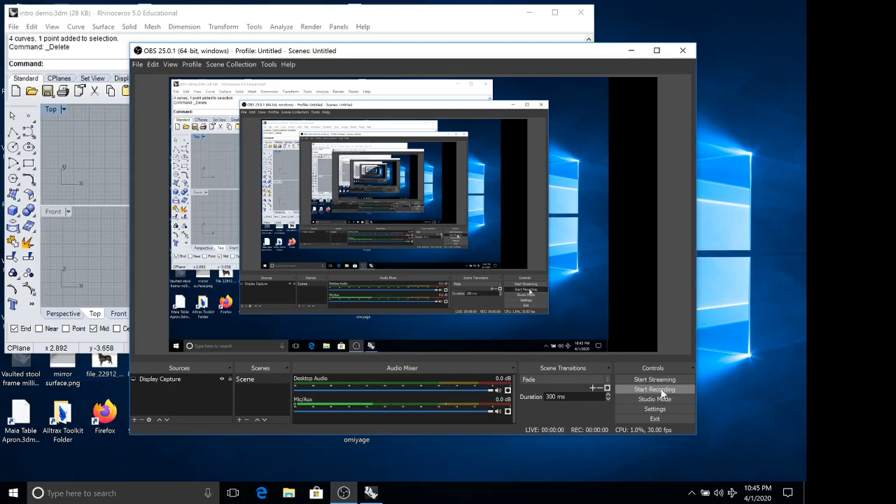Okay guys, so I'm going to walk you through how to do the tool tote. This won't be a completely exhaustive explanation of Rhino, but hopefully by actually making a drawing of something that you're going to build, it will land a little bit easier.

The first thing I'm going to start off with is making sure I'm in the default layer, and I'm going to make a rectangle to encompass, just like we did with the orthographic drawings, the furthest extents of the geometry. So I'm going to start at the origin, so I'll say 0, 0 for the first corner of the rectangle.

For the next corner, it will first ask for the x-axis number and then the y-axis measurement. So if I type 20, it will go to 20 inches out on the x-axis, and then if I type 10, it will go to 10 inches up on the y-axis.

And these dimensions are somewhat arbitrary. We left them open so that you guys would have a chance to really customize your tool totes for your own uses, so I'm kind of making them up as I go along. Now I have a rectangle symbolizing the full extent of my tool tote here from the front.

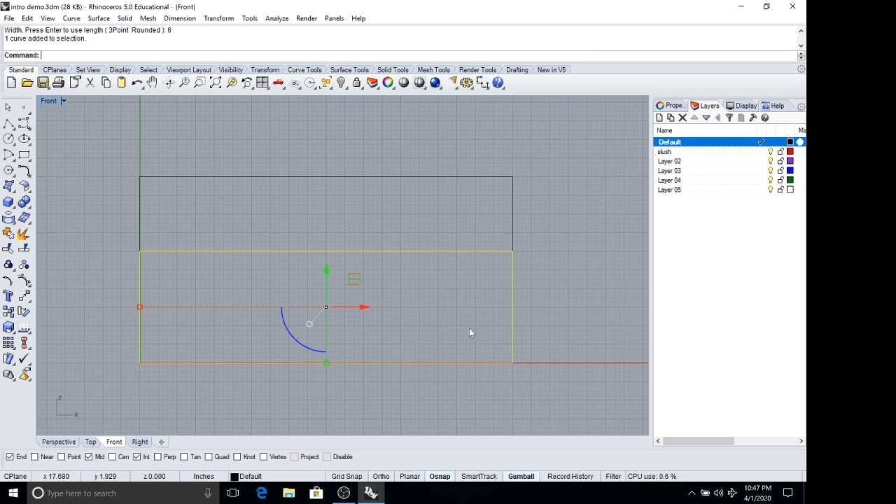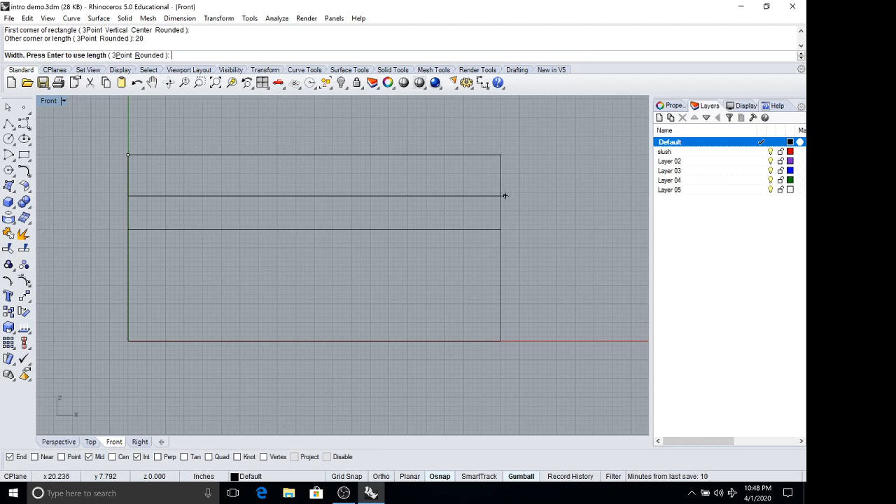Okay, so the next thing I'm going to do is draw the handle. I know that's going to start from the top, so I'll go into my polyline and click rectangle. Again, I want it 20 inches long, and because I'm coming from the top, the y-axis measurement is actually going to be a negative number rather than a positive one. So I'm going to say negative 2.5.

Okay, so I have these two rectangles placed now. And because this handle looks quite heavy, I will probably make an arc that I'll shape into it so it looks a little bit less heavy.

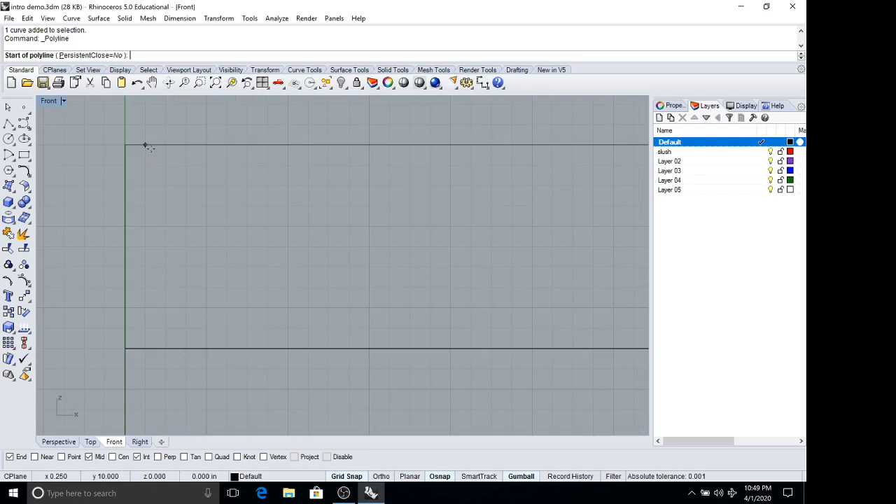So first thing I'm going to do is sketch out where my side panels are going to be, so I know I have a little bit of a straight to accommodate for joinery. I'm imagining my side panels are only going to be about half an inch wide. I could even turn my grid snap on here, and since each part of the grid is a quarter inch, half an inch is going to be 2 sections of the grid.

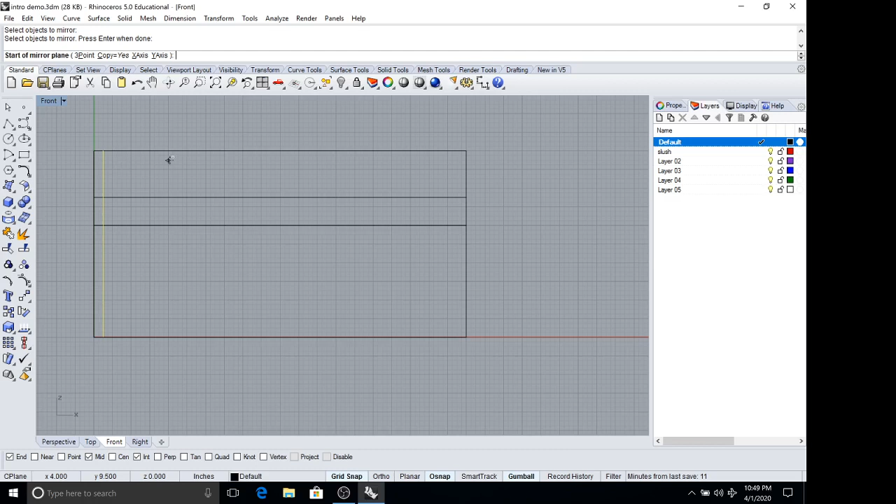Then I could do the same thing to create the side line on the other half, or I can save myself a little bit of work and use the mirror command. My command bar will always prompt me on what to do next—it says select objects to mirror, so I'll select this line and hit enter. Then it says start of mirror plane, which is basically what the line will be flipped over. I'm going to use my midpoint so my mirror plane is centered, then hit shift to go into ortho and click.

So now I have my two side pieces kind of indicated. I definitely want a good portion of my reference face kept for when I make this curve, so I know for sure I'm not risking carving into my joinery.

And then to make a curve, there's any number of ways to approach it. If I go into my curves here, you can see I can do an arc, which basically means it's a section of a circle, so it has a consistent radius. I can do an ellipse, a parabola where the radius is exponentially increasing or decreasing, spiral, or helix.

If I go into my different polyline options—actually I can't remember their names that well, so I'm just going to go into line.

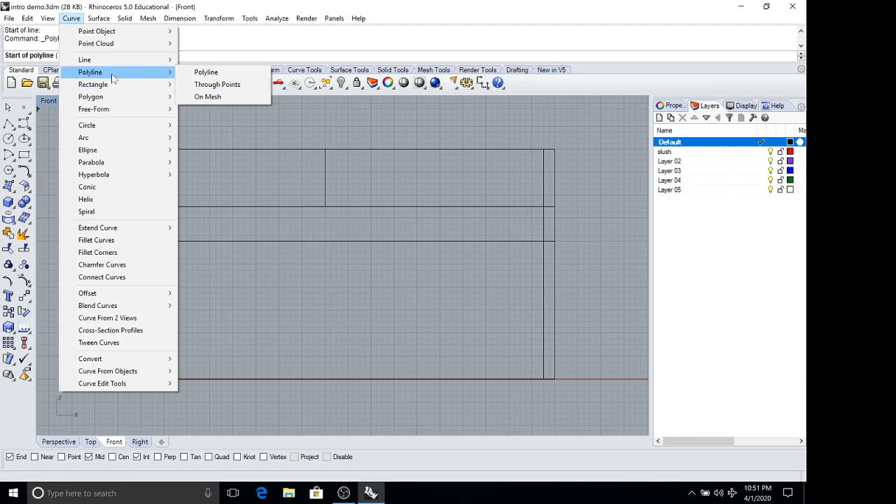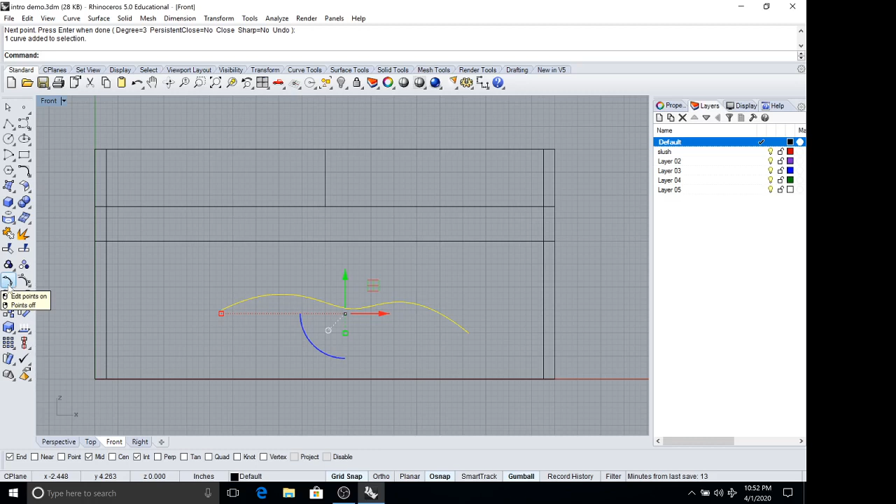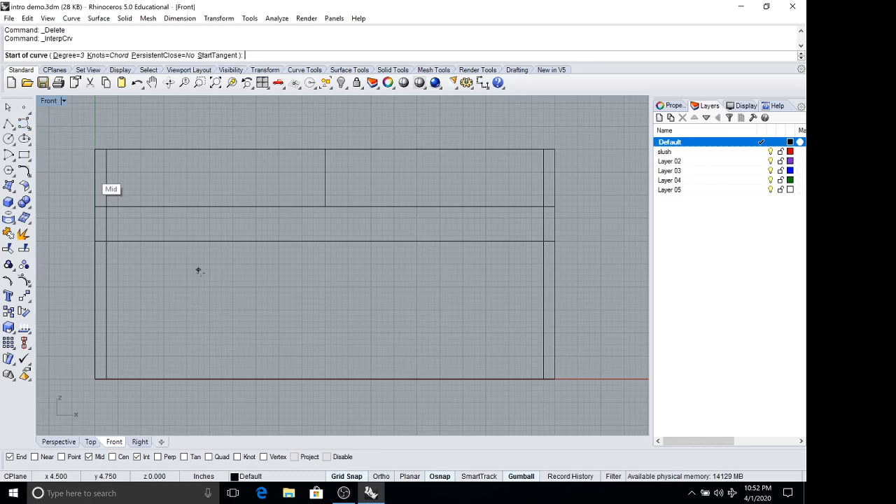And so a regular polyline, or regular curve, the control points are basically - if I go into this curve, you can see my control points are not connected to my curve, so I have a little bit less control over what the curve looks like. So if I turn my control points on, meaning making them visible, it's just a little bit less direct. So typically if I'm doing a free form curve, I'm going to go to the second option, which is curve interpolate points. That allows me to have a lot more control over what the curve looks like because the points are passing through the curve.

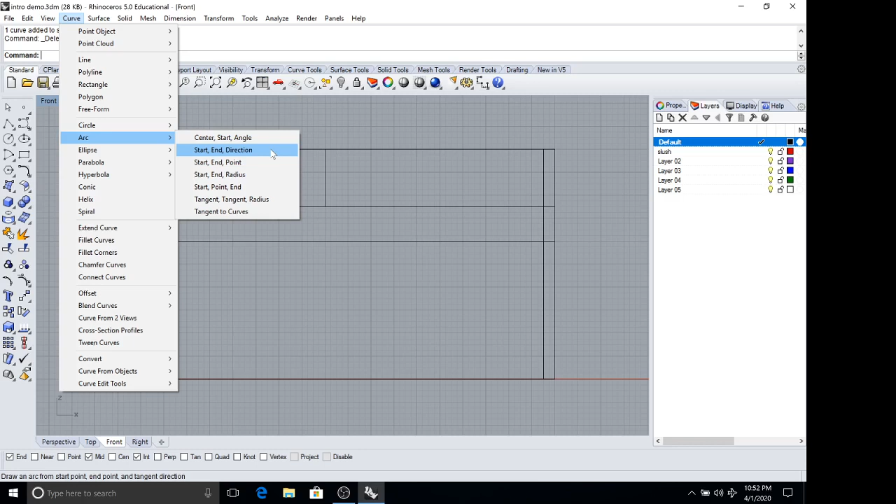For this particular curve in the handle, a constant radius will do just fine. So I'll go into arc and look at the different options that I have - start, end, direction, and point, and radius. I really have a whole bunch of different choices, you kind of have to just experiment with them and see what it looks like. So this one, I kind of control the radius with the angle of that final line there. That might be a good option. So I'll hit return and that will put me back into that original command.

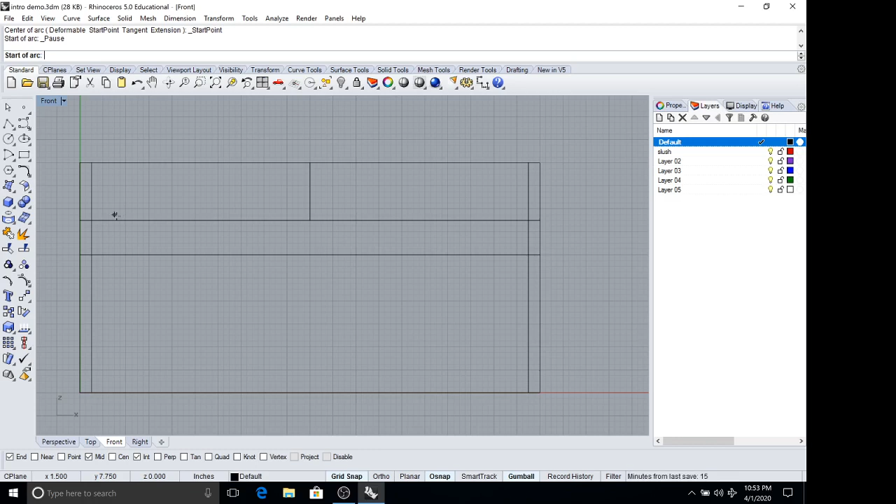And I'll go a half inch in on either side. Maybe I'll go an inch just to be safe. So I can kind of eyeball this and see what feels right, or I can type in a specific angle that I want. In this case, I'm just going to kind of eyeball it. And that looks good to me.

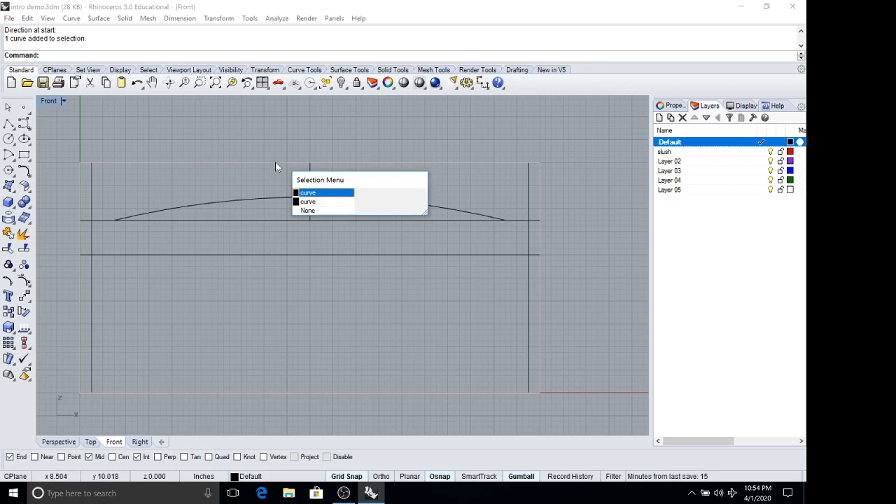So now what I have for this particular handle here is that closed curve, plus my arc, plus where it intersects the sides. So right now there's not much I can do in terms of making this 3D because none of these curves are connected to each other.

So what I can do is I can start creating different layers. So if I say this is going to be my handle layer, this is going to be - I'll just make it all the sides. This will be the bottom, that should probably be enough for now. This will be the slush. And I'll also make sure to save. It's a huge bummer when you've gone pretty far and then suddenly you realize that you haven't saved in ages and the entire program crashes.

So what I'm going to do now is create a new geometry that just includes the handle with the arc, but not including the through mortises that go through. Actually, no, I'll just include the full length of the handle. So that will be this guy here, and this curve here. So what I'm going to do is use the trim command.

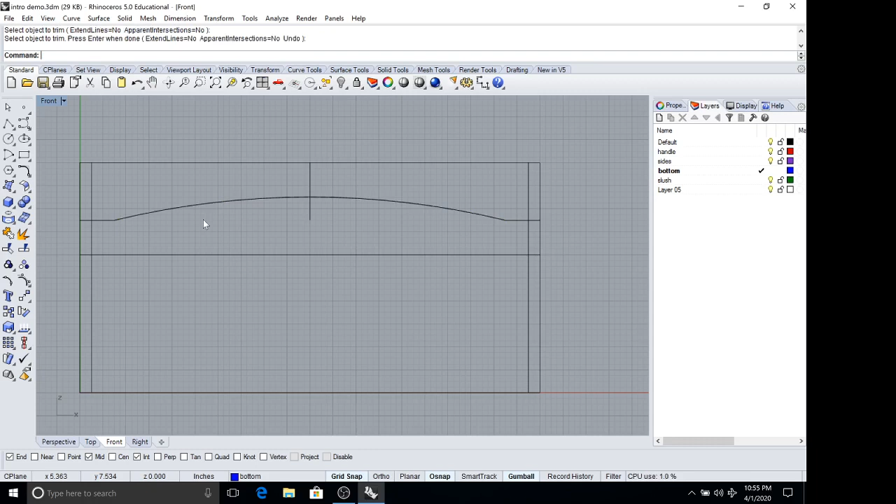It will say select cutting objects, so I want my arc to be a cutting object. Hit return. Select object to trim, I'll hit that rectangle, and then enter when done. So now if you look at my properties, I have two open curves. Open curves, you cannot really create a solid from - you can only create a surface. So I want to create a solid, so I'm going to select these two curves and join them together. And so you can see now on my properties, this is now a closed curve here.

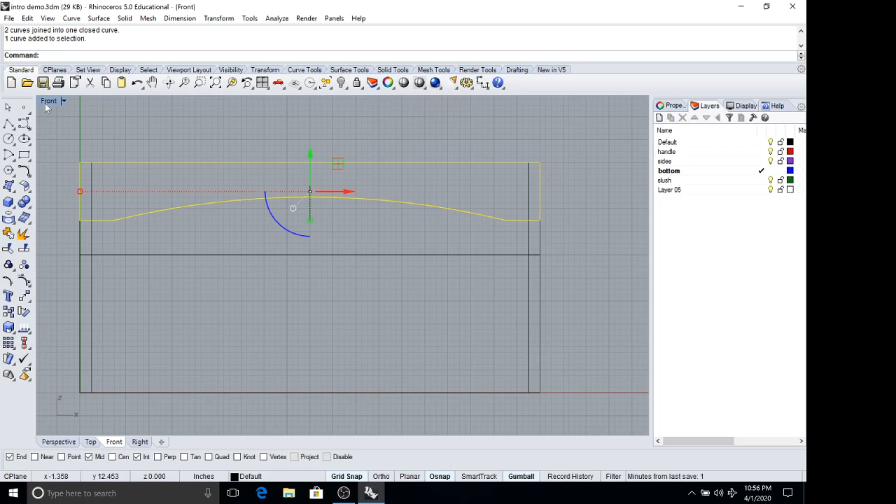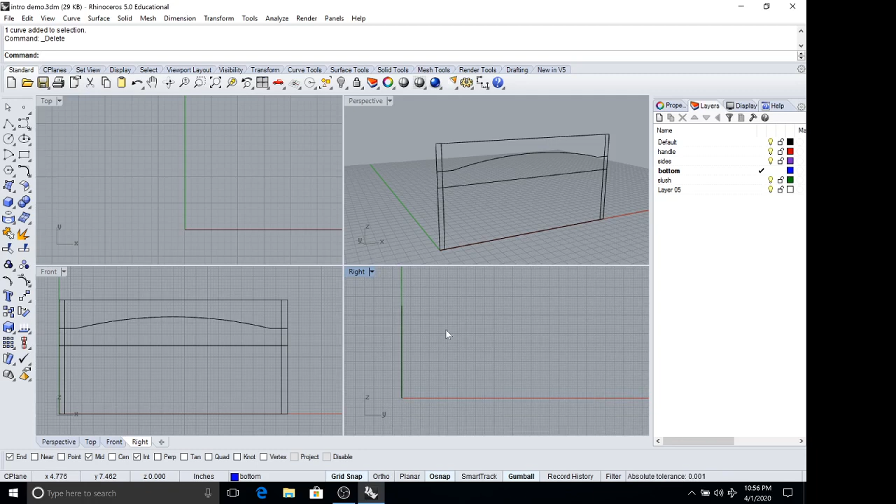Okay, so I think we've fleshed everything out from the front view. I'm going to double click and go to another view now. And you can see from my perspective that everything is planar, meaning that it's all along a single plane. Now that I am jumping into another viewpoint, there's always the risk that I could accidentally draw in multiple planes, but hopefully I'll continue to go into perspective and double check myself, and if I do draw in multiple planes, there is a command to reverse that.

So now I'm going to draw in my right view, and I'm going to draw the profile of the side pieces. I already have here all of my geometry lined up. And I'll first start - I'm going to hit 0, 0 because I don't want to be clicking way out. I'm going to be in the sides layer. And I know it's probably going to be, let's say, 6 inches wide and 10 inches tall. So to me that looks a little bit awkward, so maybe I'll make it 8 inches wide.

And that looks a little bit nicer. I'm going to draw a center line because it's always going to be easier to draw one half of my geometry and then just mirror the other half over.

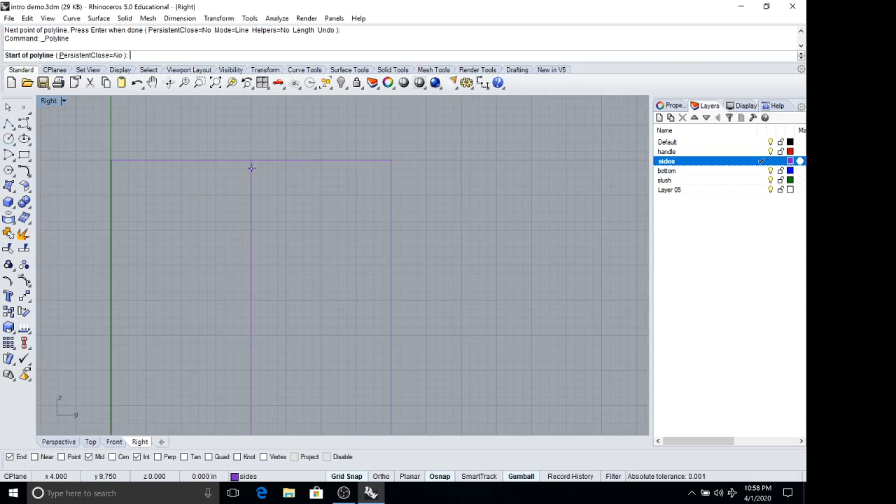I'm going to decide on the placement of my mortise. If I just draw a line to symbolize my handle, I know that my handle is 2.5 inches. So I need to have a through mortise that's smaller than that 2.5 inches.

So what I can do is split the center line here. If I say split, objects to split, cutting objects, you can see now this has become its own center line. So now I should be able to draw a line to indicate where my handle is, and draw a line to indicate the smaller mortise.

Let's say that my handle is a half inch wide. Maybe I can make it a little bit beefier and make it 3/4 inch wide. I'm going to delete that. I'm going to actually just draw my handle in space and then place it afterwards.

I'm going to turn off grid snap. Actually, I don't need to turn it off just yet. I'll make it 3/4 inch wide, 2.5. And by touching off on my beginning point, I created a closed curve.

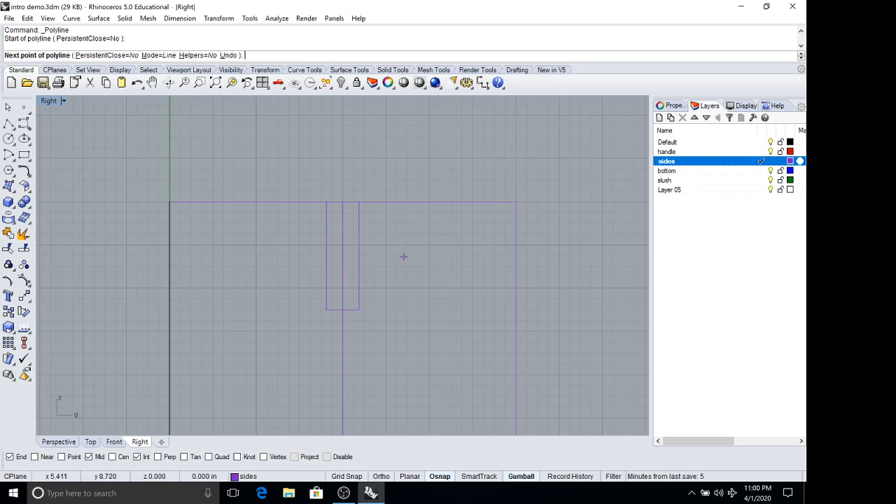I'm going to click kind of in the middle of nowhere and say 3 divided by 8 for 3/8, because this command line can do math, which is really useful. I'll use shift as ortho, say 2, 3/8.

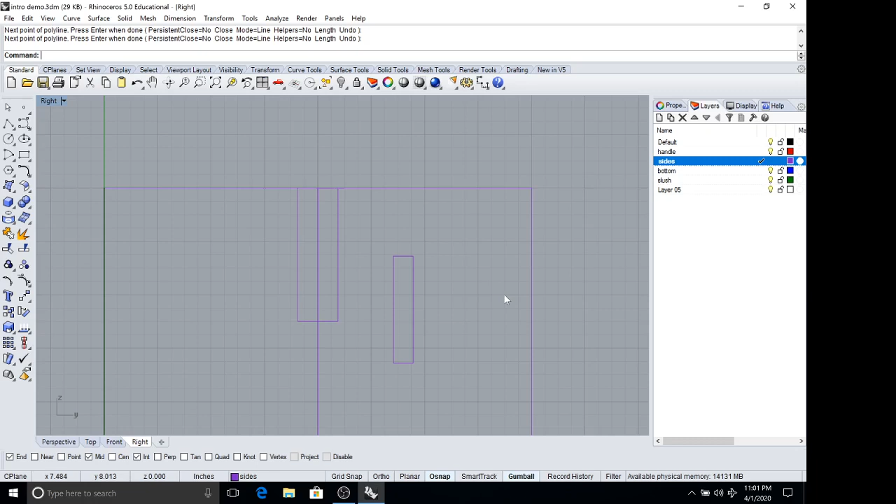Now I should actually be able to use my center snap to place this guy. So I'm going to say move, select objects to move, snap on my center, and then snap on the midpoint of my line here. Now this guy should be able to just go into my slush, because this just indicates the side of my handle.

And so I will hide that there. And this is actually looking too close to the end grain right there. It's going to be creating a lot of short grain. So I'm actually going to move my entire handle downwards.

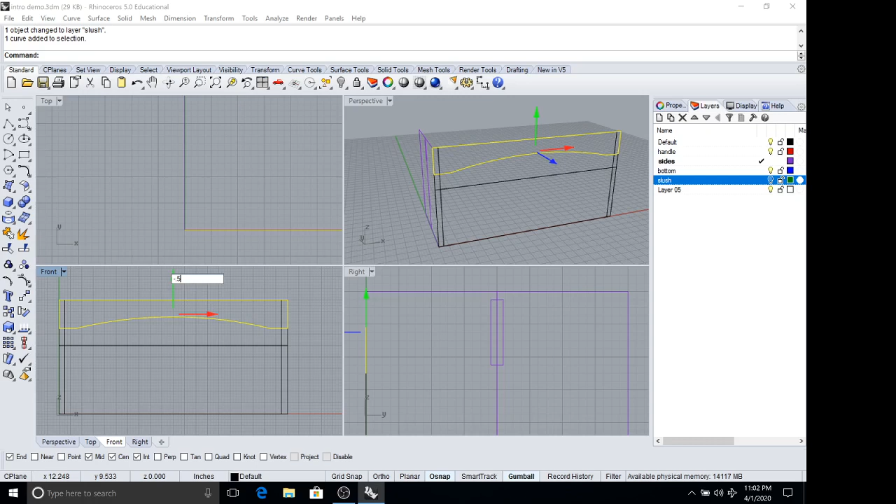So I'll move it downwards by 1/2 inch, minus 0.5 or minus 1 divided by 2. And I'll do the same with this guy here, minus 0.5. That looks a lot better, because now I have almost exactly 3/4 of an inch of short grain there, which is a lot stronger than the 1/4 inch that was there before.

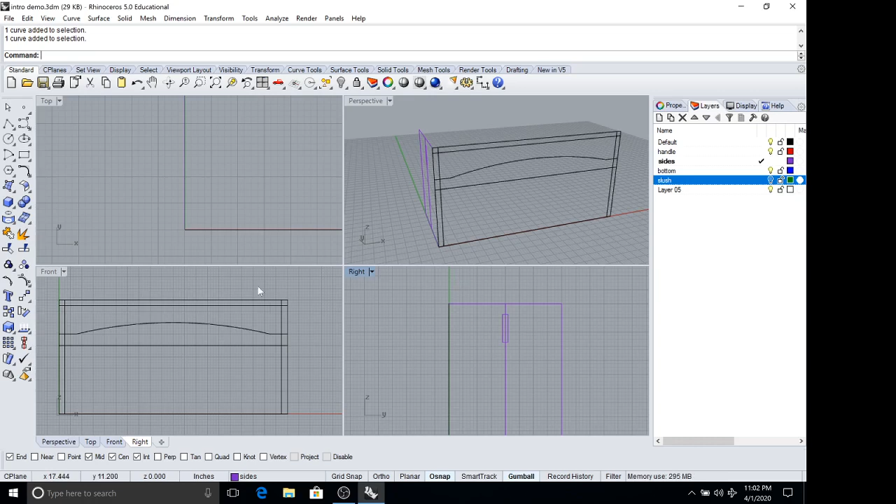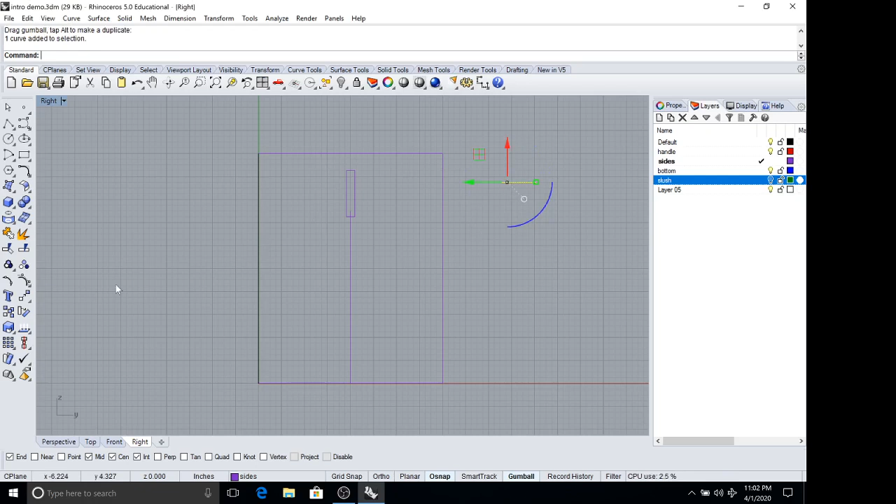Okay, so now going back into my right view, I can start to reuse this line here. I'll move it out of the way. I'll angle it to 90 degrees, and that can be the width of the top of my tool tote. And I'll select the midpoint and the center line.

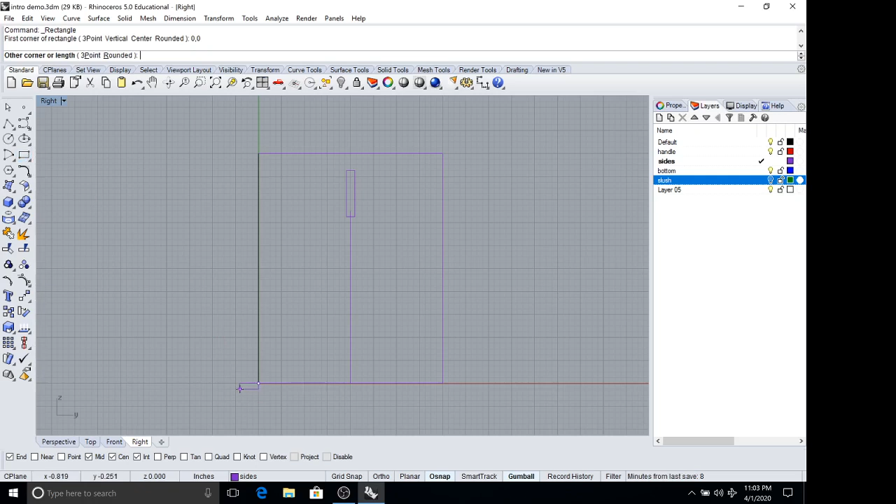And then I know from my side pieces that those are going to be 6 inches tall. So 0, 0, 8, 6.

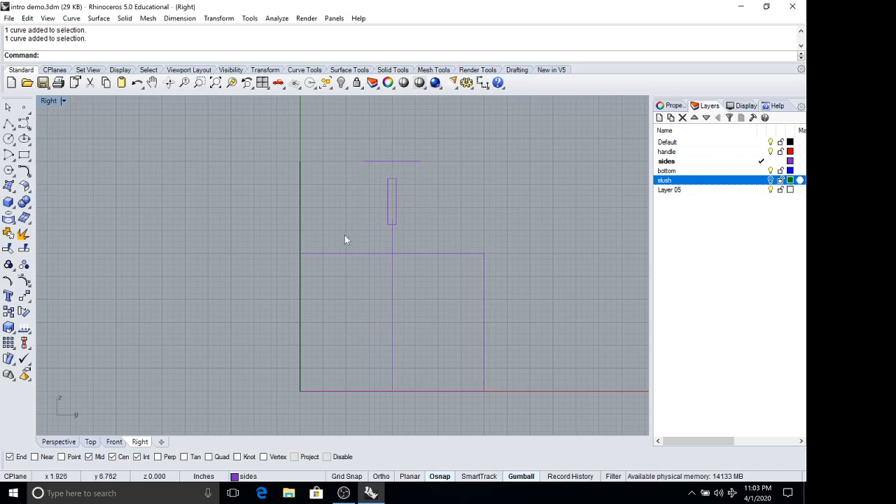So if I delete this all-encompassing rectangle, I have the top of my tool tote here, the dimensions of my side piece, my through mortise here. So now I just need to create some nice lines in between.

So one arc that I particularly favor is start, end, direction, because what I like to do is hit the start, the end, and then just snap into ortho. And that usually just creates a really nice looking curve for me. Feel free for you guys to experiment around and put your own personal twist on it.

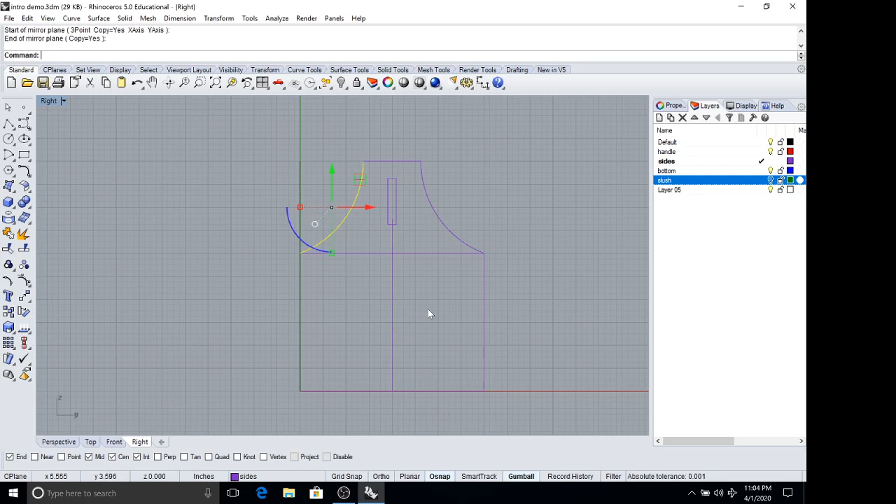And then I can mirror that over. Now I have the side profile of my piece, and these are all open curves right now, so I want to make it one closed curve.

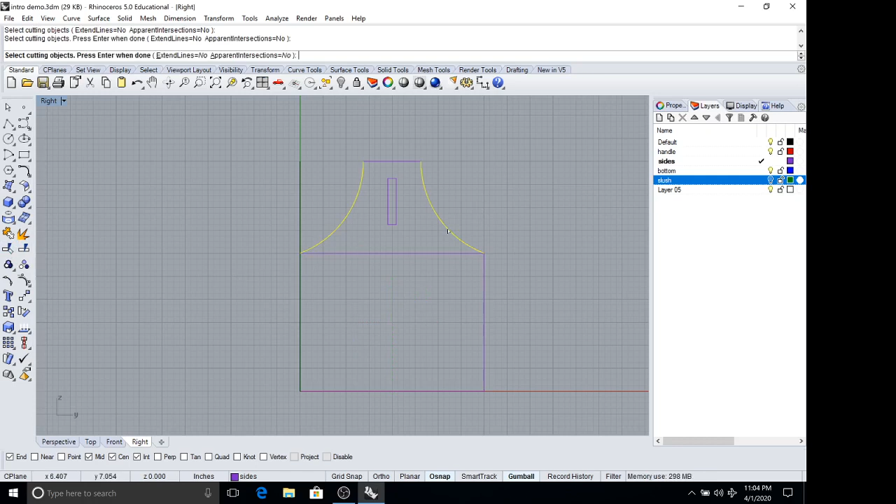So again, I'm going to use that trim command, select my cutting objects, return, object to trim, return, and then you can see when I select on this line, it shows me all that other geometry that I drew on my front viewport, but I want this geometry here in the purple.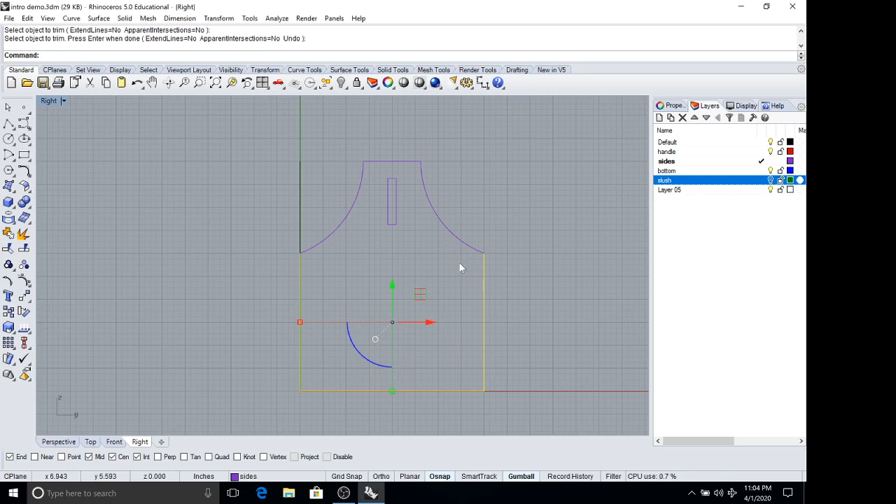So select that, and then I can actually hold down my shift key. Shift key is basically additive in Rhino, and drag from right to left. So when you drag right to left, everything that you even touch just a little bit gets fully selected. If you drag left to right, only the bits that you specifically select all the way will become selected. And then I'll join those together.

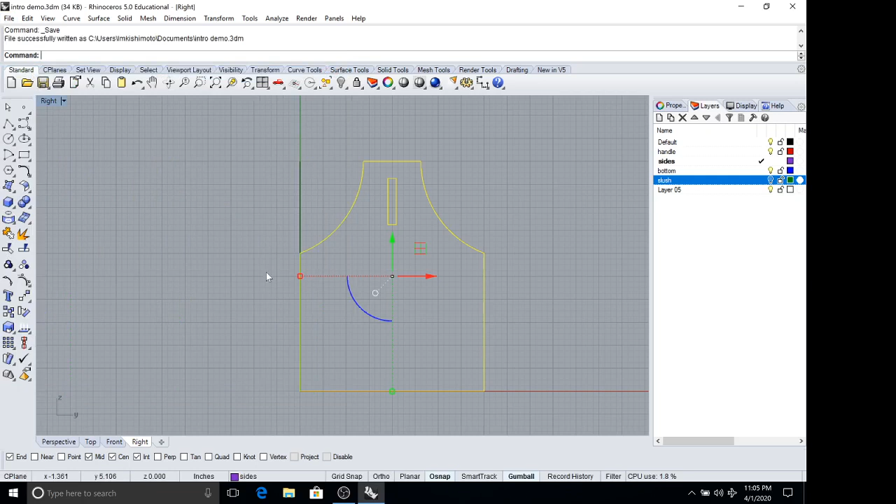And hit save one more time. Okay, so now I'm just going to go double check to make sure my geometry is all in a good place. Looks pretty good. And now I can start getting ready to make this 3D.

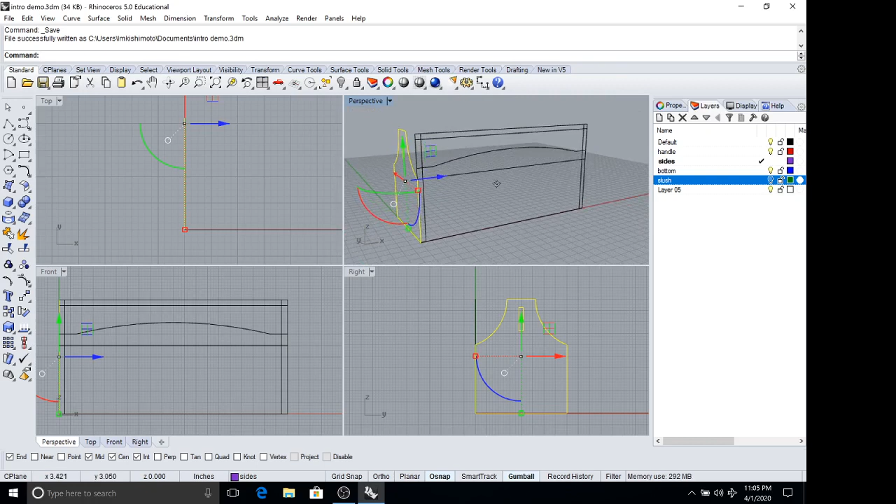Perspective viewpoint is going to be really useful. So I'm going to take all of these highlighted lines and put them in my default layer, and I'm only going to have solid geometry in my other layers, keeping this as reference points instead.

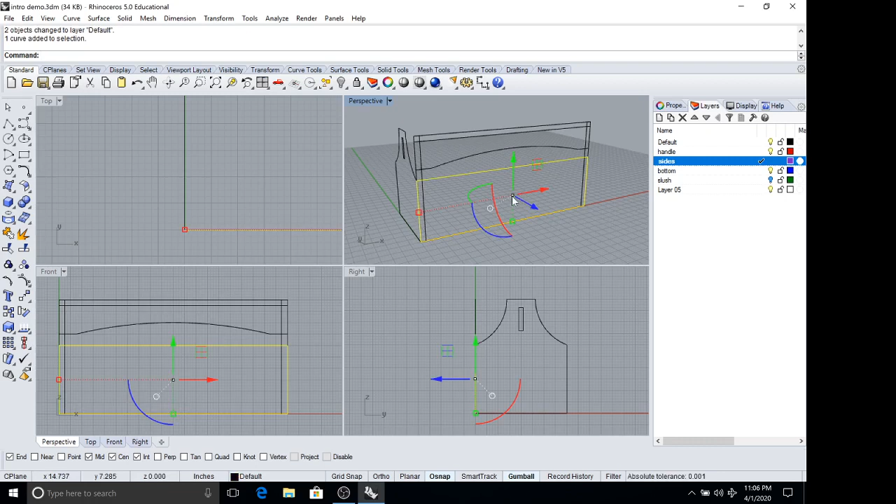So the first thing I could do is select this side piece and extrude it. Extruding, if you imagine a Play-Doh noodle maker, is just taking a profile and pushing it in one direction or both directions.

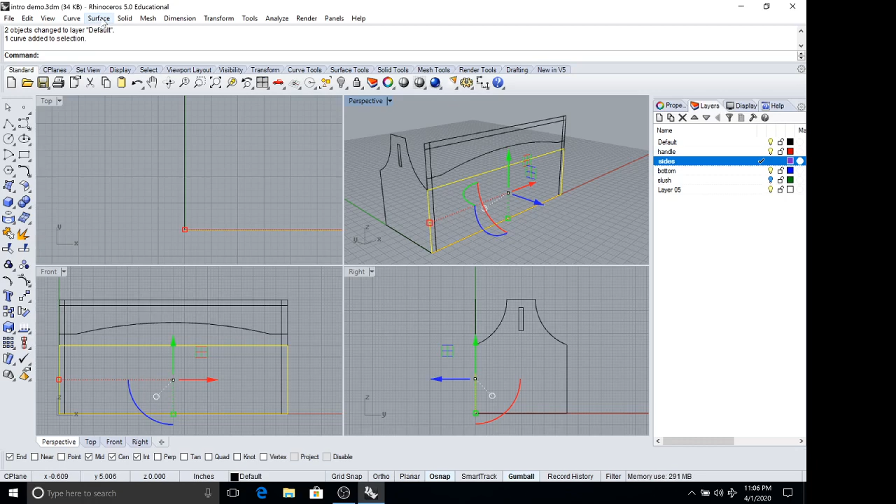It's in the surface tab, and I'm going to extrude straight. I'm also going to click on this arrow by perspective and switch it to shaded from wireframe so I can see the geometry I'm making.

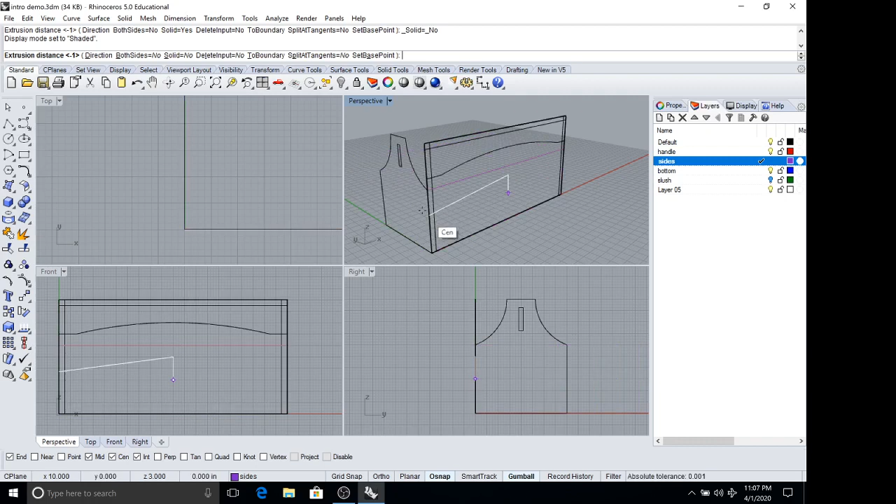So you can see right now I'm making this hollow box, and I don't want that because I want a solid object. So I'm going to say solid equals yes, just clicking on that in the command.

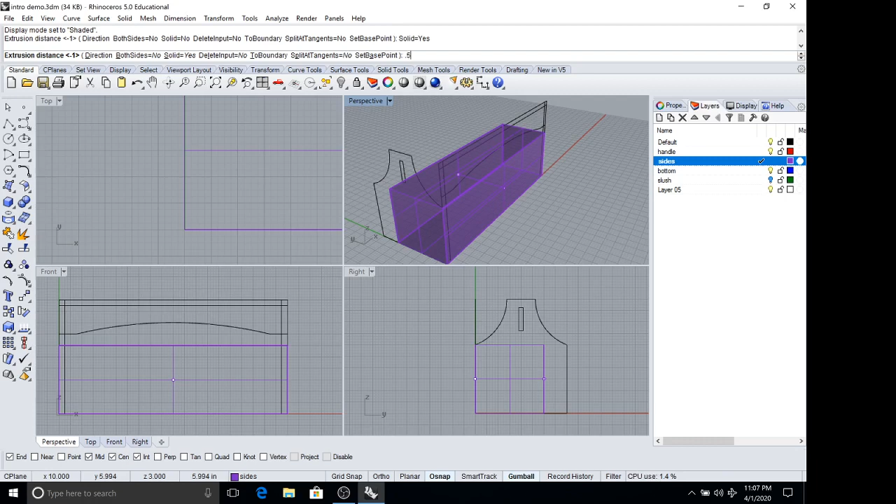I want my side to be half an inch thick, so I'll say 0.5 for my extrusion distance and hit return. You can see now I have a solid wall on both sides.

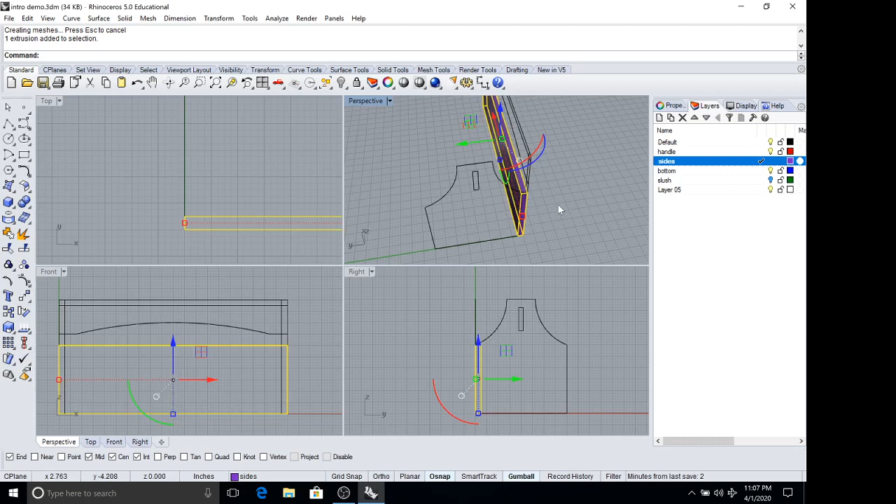And now I should be able to mirror the other side of the toolbox. I'm going to say mirror, go to my right view, and mirror off the center point. So I have the two walls of my toolbox there.

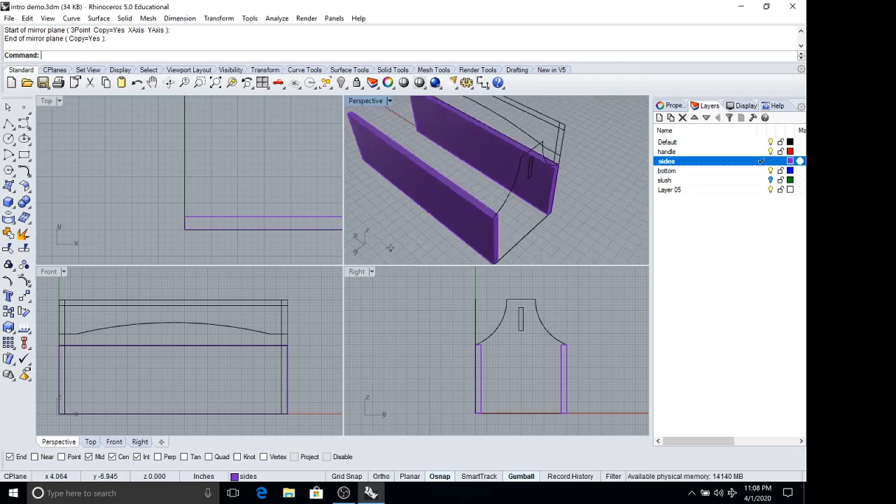When I go to select this side here, you'll notice it does not select my through mortise, which could be problematic if I want to extrude it all in one go. So what I can do is select everything and say group. What group does is that now every time I click on it, it highlights all of those geometries at once.

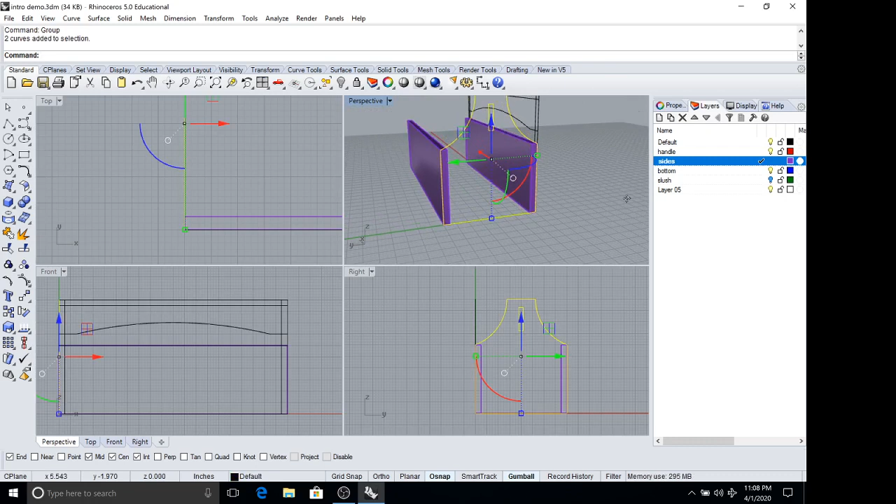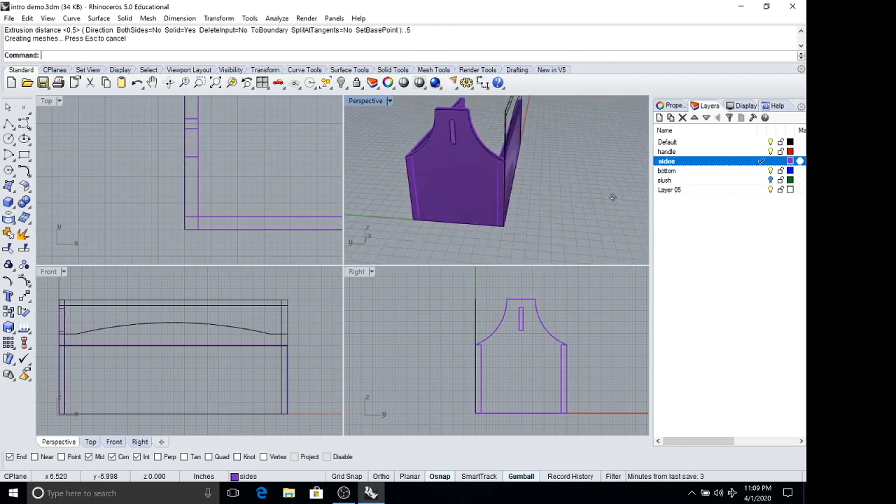So if I want to extrude this also half an inch here, make sure that it's solid - as it learns your patterns, if you always extrude solid, it will start to automatically suggest solid. Again, I'm going to say 0.5 inches. You can see it extruded it with that through mortise included, which reduced the number of steps I have to go through.

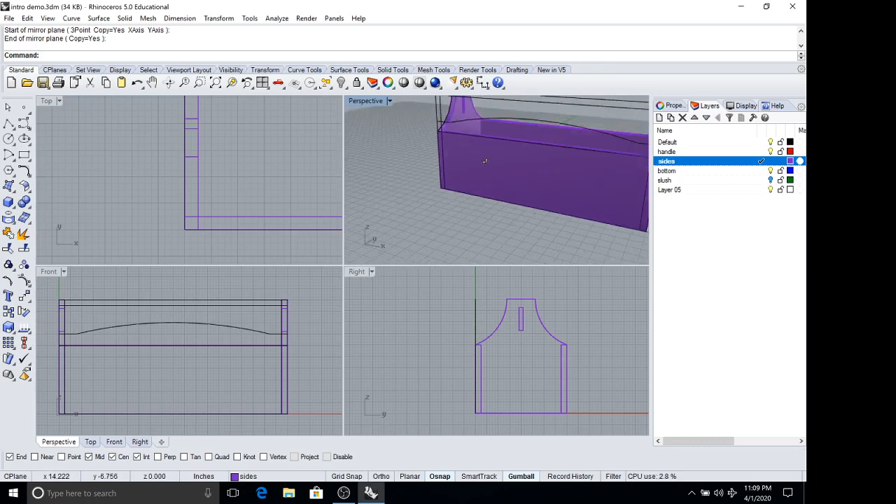And now I should be able to mirror that to the other side using my front view. So I'm going into my front view, hitting the midpoint, and creating my other surface. Cool.

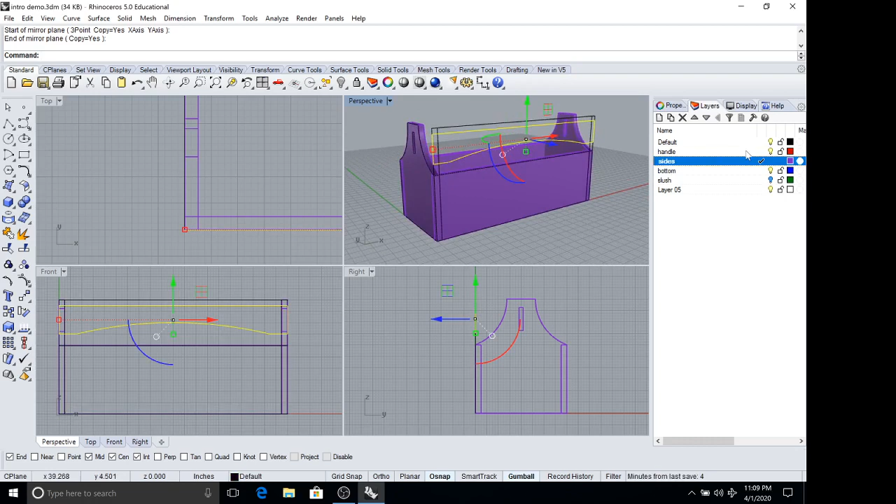Okay, so now all that's left is my handle. So I want to get into my handle layer because that's going to be fairly different. And I want it to be centered, so I might move the drawing I've made to the center of my piece. I know it's 8 inches, so I can use gumball.

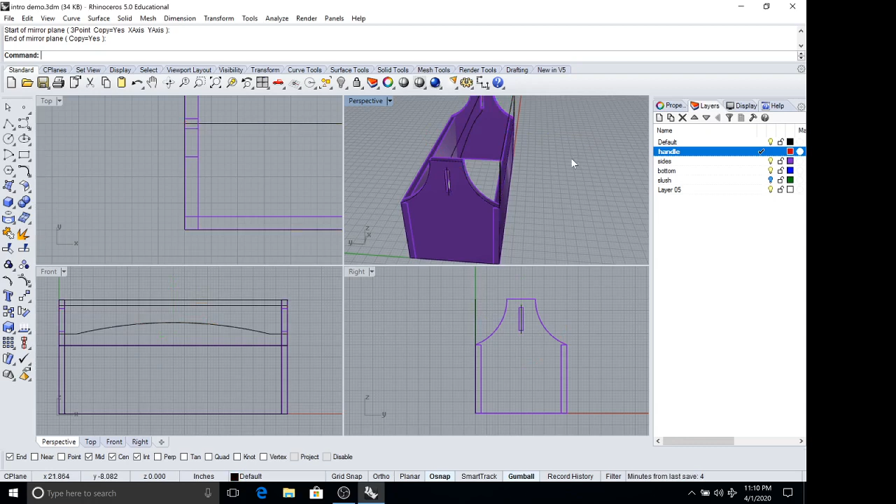And because that arrow is pointing in this direction, and I want it to move in this direction, that means I'm going to have to say -4 instead of just 4. You can see now that it's centered itself in the middle of my tool tote. And now I can again extrude this guy.

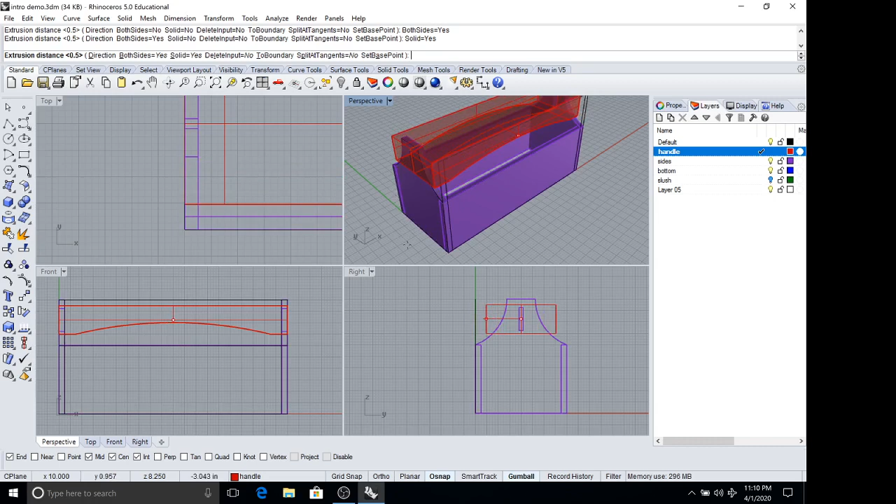But this time I'm going to say both sides yes, solid. And because I'm extruding from the center of my lines instead of just from one side, I have to divide the thickness in half. I know my handle is 3/4 of an inch thick, so I want to extrude 3/8 in both directions. And you can see I have my handle.

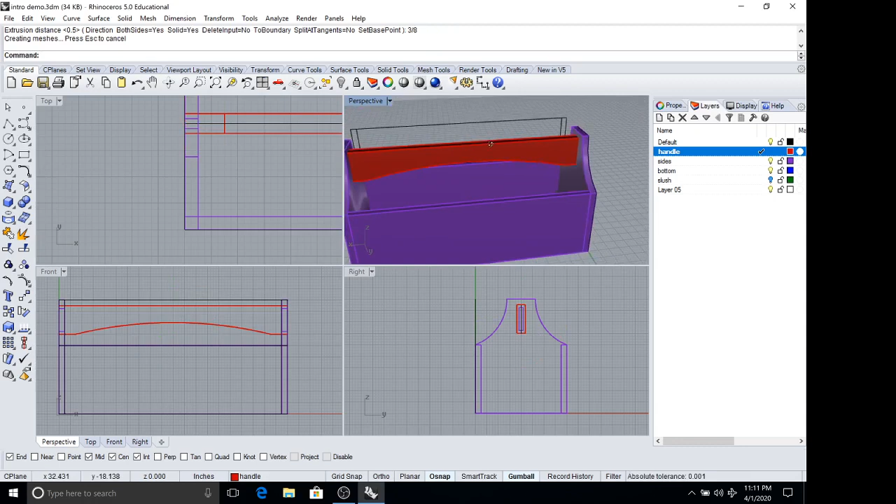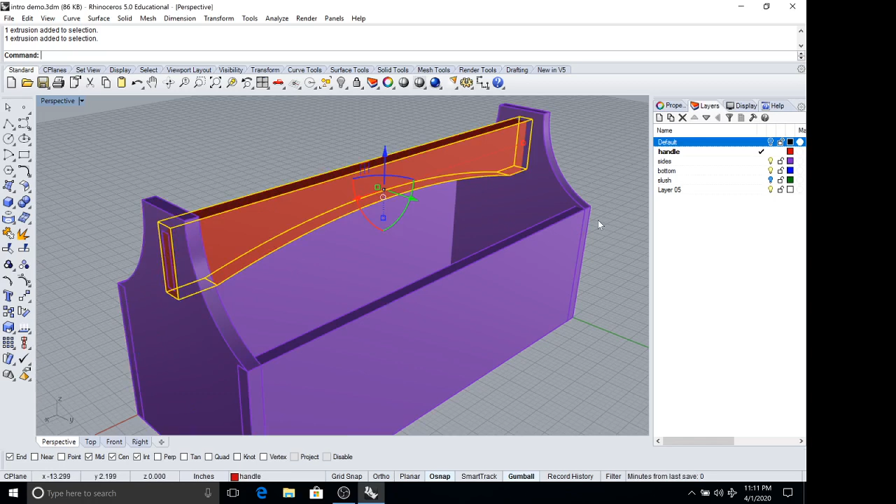So if I go into perspective, I'm going to hide my line layer. You'll start to see I'm having some problems because these two surfaces are actually overlapping with each other. So I have a super useful command for that.

Basically, anytime you're working with two solid surfaces interacting with each other, you'll want to use a Boolean command. So if I start to type Boolean, you'll see there's a whole bunch - Boolean difference, Boolean intersection, Boolean split, Boolean union.

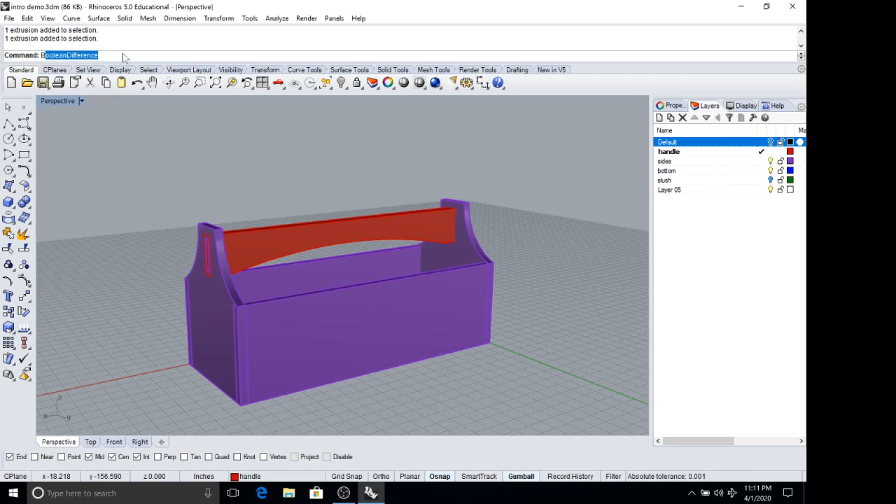In this case, I want Boolean difference because I'm subtracting from one surface. So I'll hit return. I want to subtract from my handle, hit return. Surfaces to subtract with are my sides.

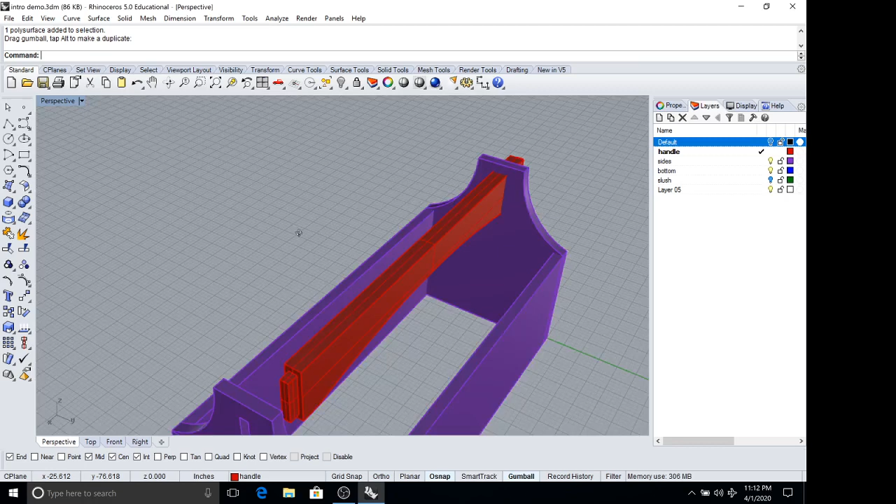And now you can see it's worked correctly. I've created automatic tenons, which is pretty nifty. So I didn't really have to do any work at all. Just a single command for that.

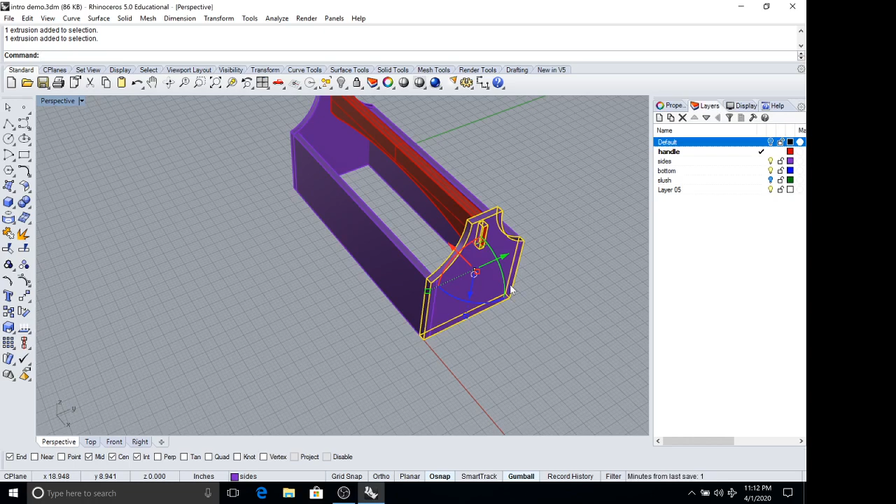Another problem I'm running into is my sides are fully intersecting with each other on the corners, so there's a number of types of joinery I could use for this. One of the simpler types, not really strong in a larger capacity, is known as a rabbet joint, and that's what's in the tool tote drawings I gave you a few weeks ago. I'm going to go with a rabbet joint just because it's really simple. But that would involve these guys not overlapping quite as much.

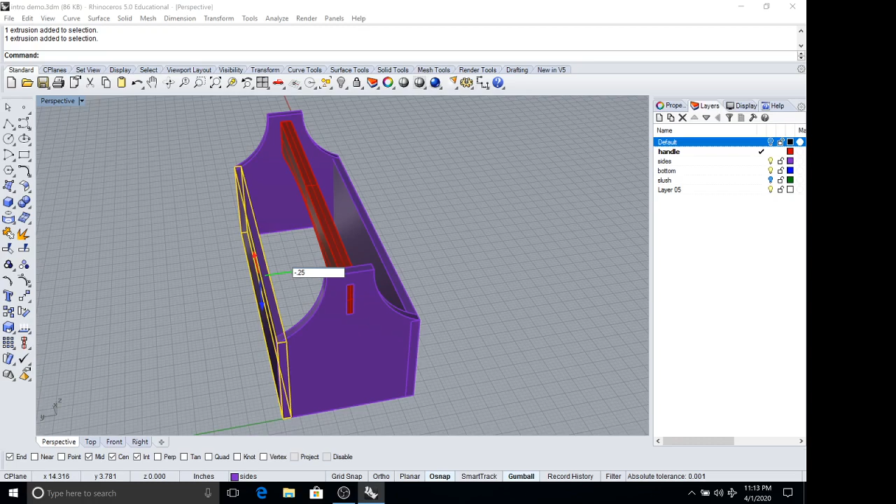So this guy is right now overlapping by the full half inch. I'm going to say minus 0.25, so minus a quarter inch that way. And you can see now, if I look above, this is what's known as a rabbet, this sort of L-shaped joint.

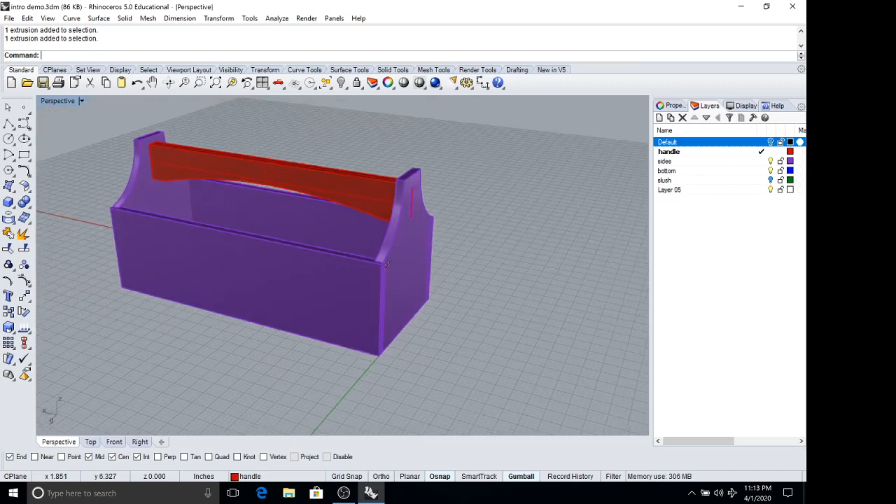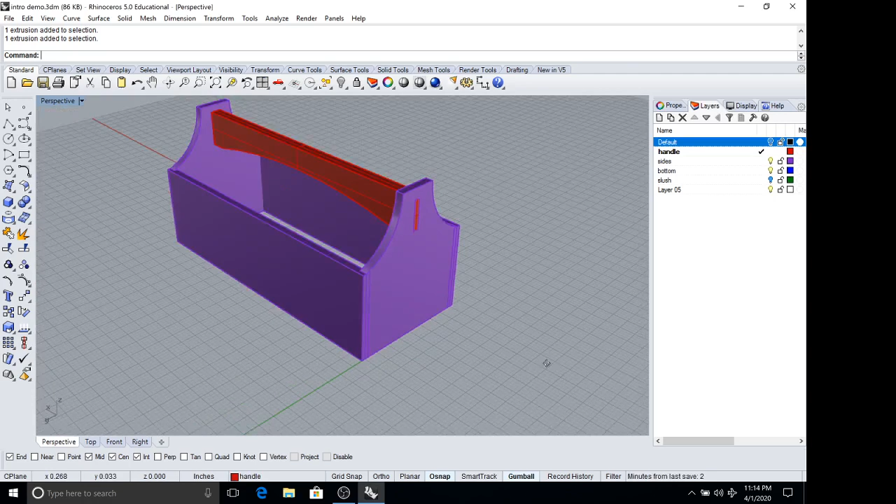Normally this is not a very strong joint because there's almost never any long grain to long grain glue surface. But in this particular case, because this board's grain is running horizontally, and on this board the grain will be running vertically, I will actually get some glue surface. And because it's a pretty small scale project, there's not nearly as much pressure for this joint to be super strong, because it's not like a dining room table or a chair or anything like that. So I've moved those out by a quarter of an inch on both sides.

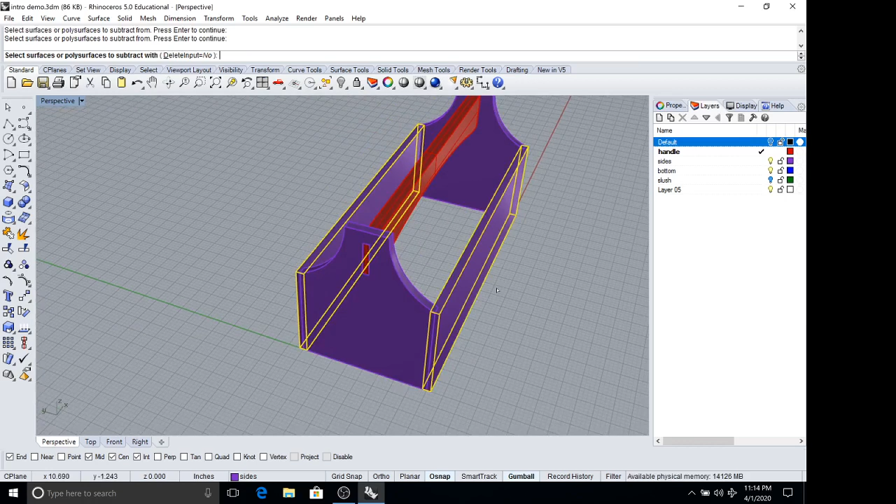Now I can again use my Boolean difference. So I want to subtract from these sides here to kind of create that little shoulder, and subtract with these sides here. So you can see now I've created a little shelf for those two pieces to interact with.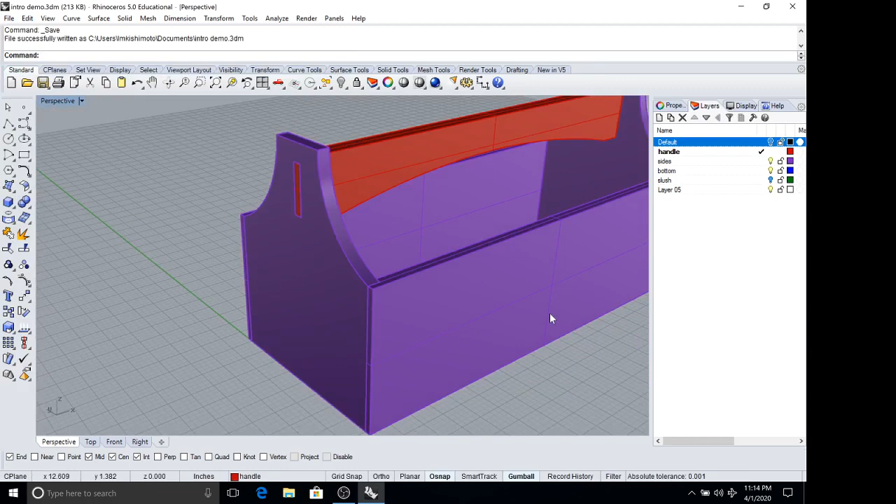Okay, so I have almost all my geometry. The one thing I'm missing now, which is pretty critical, is my bottom. So for the bottom, I'm going to go into my top view, because I want to actually trap a panel inside my tool tote, so there's no chance that bottom will ever fall out, because that's where my heaviest load is going to be on the bottom due to gravity and heavy tools.

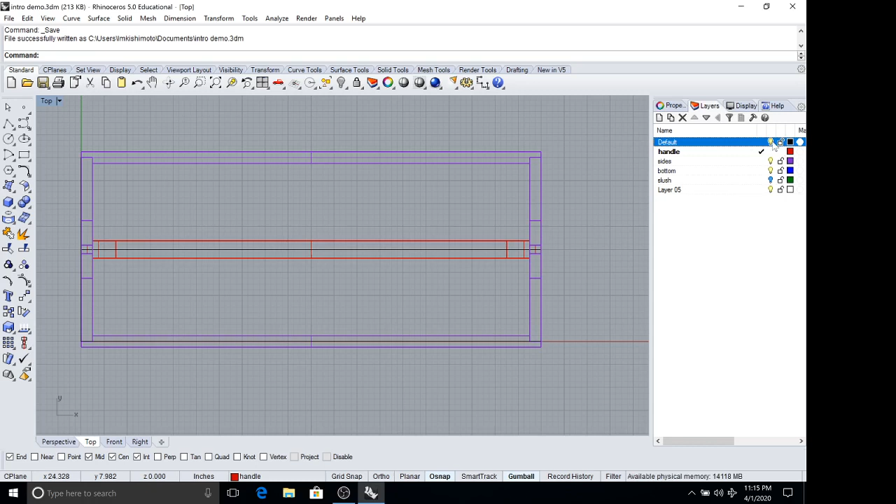So I'm going to go into my top view, and I'll turn on my sketch lines again. In this case, based off of the drawing we sent you guys, the bottom actually has some through dovetails coming along these side pieces here and here. So while the bottom will be captured in a groove along the long side, it will be passing all the way through and interacting as dovetails with the short sides.

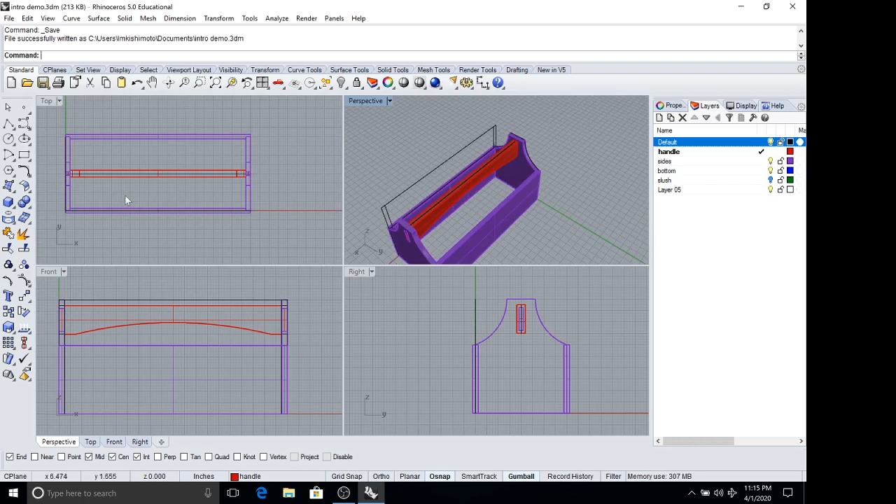Okay, so I'm going to hide some of my geometry because it's kind of getting in the way for me. And actually, maybe I'll just go into my bottom layer and get rid of all of my geometry altogether.

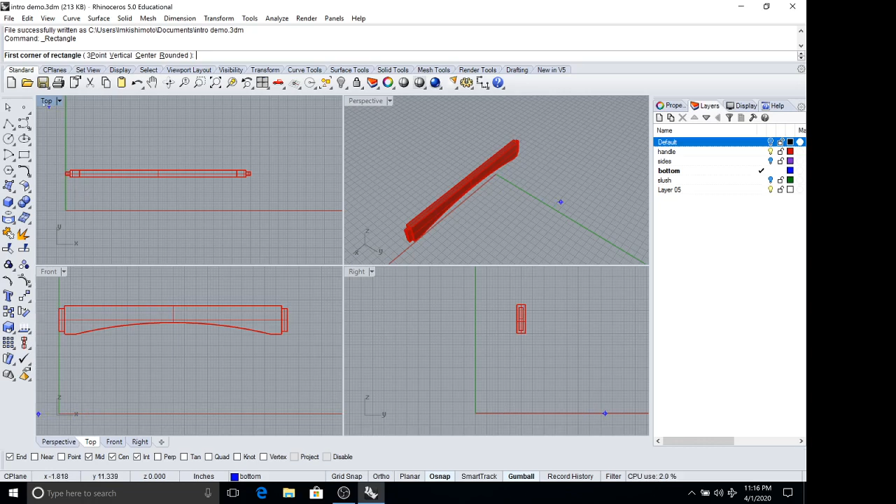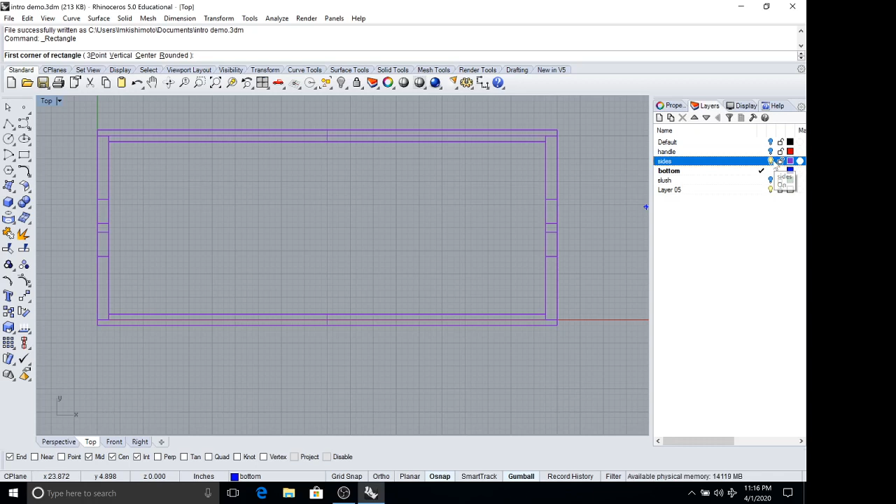Okay, so since I already moved these sides a quarter inch over from where they were originally on the x-axis, that's actually kind of perfect for centering my panel in the bottom, because I'll just start at the origin here. So I'll say 0, 0, and I want it 20 inches long and 8 inches wide. Just to double check, I'll look at my side pieces.

And if I select that curve, you'll see that it's trapped in a groove along the long side and it's coming all the way through on the short side. So that's exactly what I wanted.

And then I also want some dovetails. So I'll have to make this piece probably at least a half inch thick to have any sort of substantial strength from those dovetails.

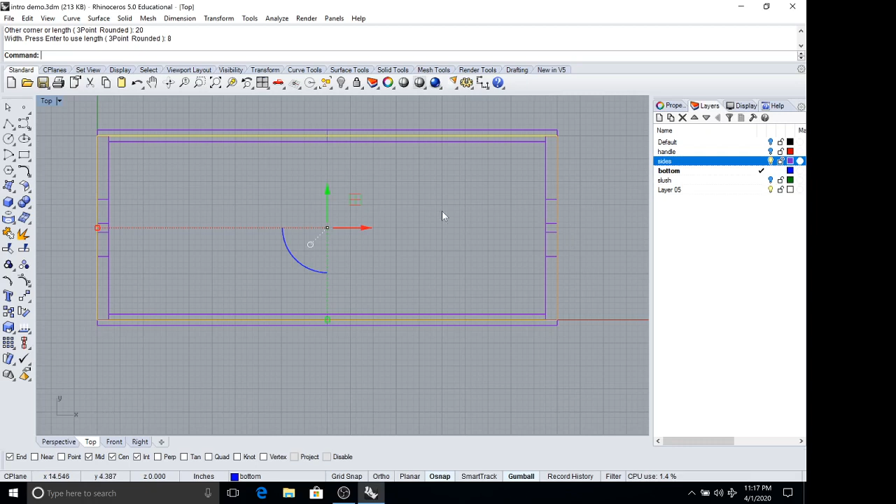So let me just see. I'll hide this guy again. And my dovetails, I want them to be from the side of my piece, because I want the strength of the dovetails, the mechanical strength that I get, to be resisting gravity. So I think I might end this video here as is, and then I'll go into dovetails in the next video.